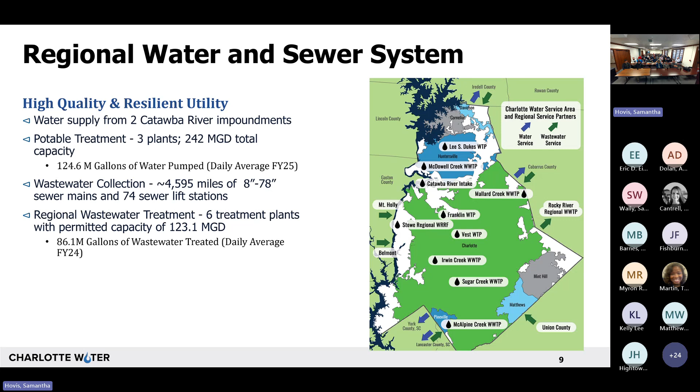And I didn't necessarily say it there, but we're called CLTWater, and we are a department of the city, but we don't just serve the city. We serve all of Mecklenburg County, and then we have a number of interconnections with all of the towns and cities that surround us. Some of them are everyday use and others are emergency connections only.

Lots of valves, almost 100,000. So a lot of work for our field operations teams to make sure those are in working order. And if you've ever done any pipeline work, they always are.

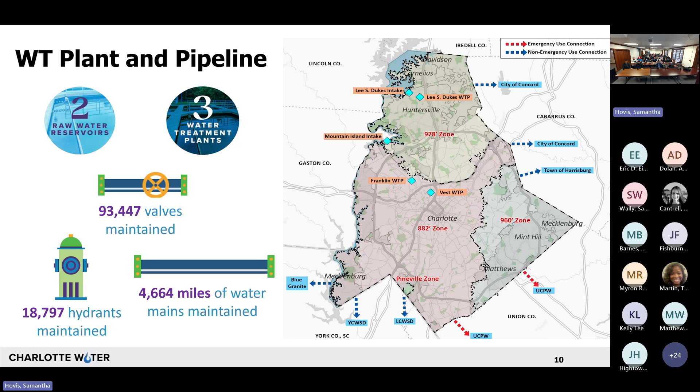We have 2 different raw water reservoirs at the Franklin water treatment plant. And then I mentioned we have the 3 different water treatment plants too.

We have over 9,000 miles of main. On average, we treat almost 90 million gallons of wastewater every day, and we pump out 125 million gallons of water. We are a AAA bond rated company. That's something we are proud of, and it takes a good amount of management to maintain that.

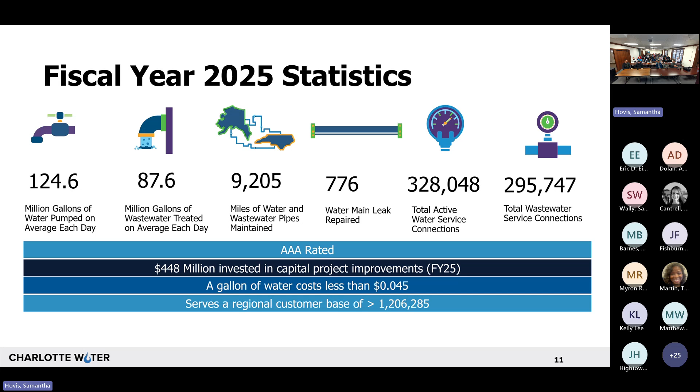As of fiscal year 25, we've invested almost $500 million in capital improvement projects. So there's a lot of money, a lot of opportunities rolling out to be able to maintain these wastewater and water systems and be able to give our customers a good level of service. And then our customer base is over 1.2 million folks and growing. That's a real popular place for people to be.

So I'm going to turn it over to Sam to give us some details on some of the upcoming opportunities. Great, thanks, Nicole. And thanks everybody for coming today. It's really exciting to see this amount of interest in our upcoming projects. So start going through those.

All right, so today we're launching the water treatment plant and pipeline program. And so this is a new holistic program that we've been looking at. You'll see in the map, we have 2 specific areas shown. So we'll highlight those projects in those areas.

But really the reason this has come about and why we wanted to be here today is we're in the process right now of updating our master plan. And one thing that we noticed was that we're seeing significant system demands coming in, and it makes a lot of sense when you're driving through Charlotte. I feel like a tourist sometimes. There's just new buildings all over, and so that just means we have more people needing more water.

We also identified that some of the assumptions that we made originally may have been a little low, and so now is the time for us to try to make up for that. So our per capita usage, originally we thought it was going to continue to go down since our last master plan with the efficient fixtures and other improvements we were seeing, but actually it's plateaued. And so since we didn't see any more advantages from that, that's starting to catch up.

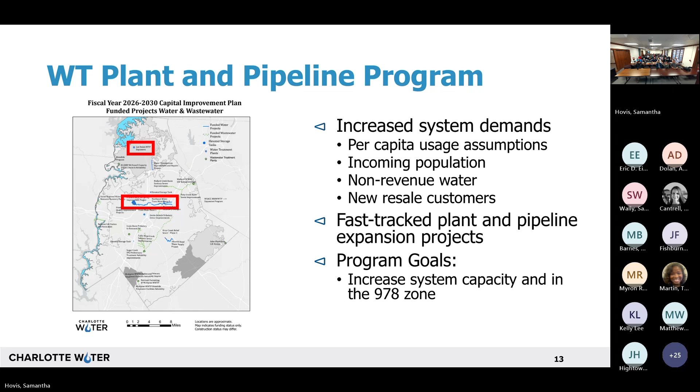So with the opportunity types that we're seeing, we're going to have multiple RFQs going out, and also just ITBs. So next, we'll have progressive design build RFQs, just professional services - I should have said just RFQ right now - but we will have multiple professional service RFQs going out. You might also see RFPs for other services, equipment, and material. So we've got hard bid construction opportunities as well. And then what that does is result in opportunities, therefore, for our subcontractors.

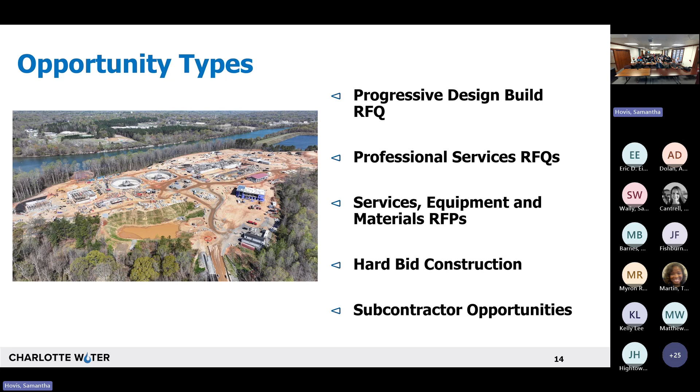So lots of exciting things we wanted to share today. So I'll start off with the water treatment plant opportunities, since we're here at Lee Dukes this morning. So like Chuck had said, this plant is a conventional water treatment plant. It was put online in 1998.

Originally, it was meant to treat 18 MGD. And then in 2000, we did some other modifications right after the initial plant was built. We added a clear well, some other improvements, and we also got approval to high-rate the plant at a filtration rate of 5.5 gallons per minute per square foot. So what that's done is resulted in a treatment capacity here of 25 MGD. So that's where we're at today.

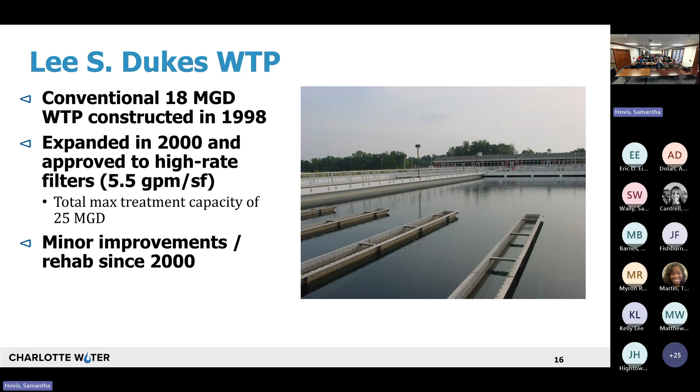So we'll go over the process flow. We'll also talk about this on our tour next, but it's nice to see some highlights. I know it's very small, but we'll walk through it.

We pull our water here from the Blythe Landing intake off of Lake Norman, not too far from here. It flows by gravity in a 60-inch raw water line.

Then we add other chemicals. We have PAC, that we feed. We're actually in the process of getting our chlorine dioxide system up and running, and we have the capabilities of adding chlorine and potassium permanganate. Once it arrives here, we add a coagulant, which is aluminum sulfate, and then it goes through rapid mix.

Then our traditional flocculation and sedimentation, and it moves on to the filters. Here we add our disinfectant, which is chlorine gas, before the filters. Once it goes through the filters, we have our finished water chemicals, which include chlorine, fluoride, and lime.

Then it goes out for storage in the clear wells. We get our CT time, and then we pump it out with our high service pumping station.

So residuals go through the classic process. We have an equalization basin followed by clarifiers and gravity thickeners, and all of that is contained here. We have partners that take those residuals, and then we land apply those.

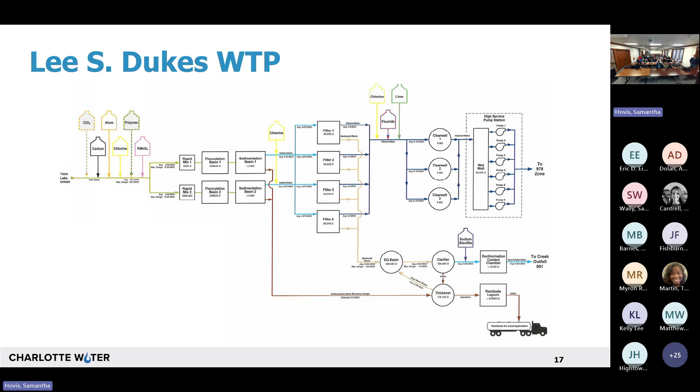Currently, I think it's worth noting, we have 2 projects going on. We have a preliminary engineering report.

We had a person in the chat who wanted to know if we could share this presentation with her. Sure, we can, yeah. Great question, though—thanks for letting me know.

Let's cruise through. First of all, we're going through a preliminary engineering report right now to define what will be included in this Lee Dukes expansion project. We're fast-tracking that with Black and Veatch, and we anticipate that being done in April of 2026.

Then we're also doing a high rate study right now. We want to see if we can get approval to treat more than 5.5 gallons per minute per square foot. We're starting conversations with the state, so we're not sure if that will get approved—there are many more discussions needed to determine feasibility.

One other part of that is we want to make improvements to the sedimentation basins right now, and we plan on adding plate settlers. We're having that design done, and we want to advertise that construction contract in April of 2026. We think the plate settlers will really help with our settled water turbidities and have other advantages as well, so now is the time to make those improvements.

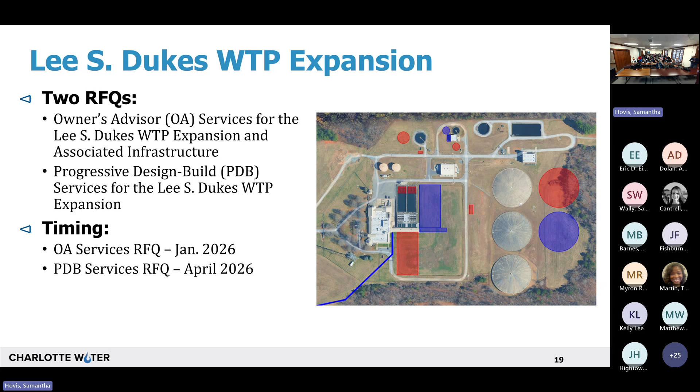We want to try to get that to coincide with having that final document, so we can share it with potential teams and they can see what we're planning. We'll talk shortly about the scope. The OA services will be professional services that help us from procurement of the PDB team all the way through construction and the warranty phases of the Dukes expansion project and any associated infrastructure.

The progressive design build services RFQ scope of work will be for the design and construction of the expansion project, which will have 2 phases. The first phase, shown in red here, will include an 18 MGD conventional treatment train and additional associated structures, processes, and appurtenances—essentially a duplicate of what we have now.

And then we'll also have residuals basins added along with a clear well and some other chemical feed modifications. The other thing of note is the plate settlers that Charlotte Water purchases. We want the PDB team to also install those basically as soon as we kick things off.

Because we want to get that advantage in the sedimentation basins. Once that first phase is done, we want to move directly into the second phase, which will be an additional 18 MGD train. We're still trying to figure out the timing, but phase 2 will include that second conventional train and any other structures and basins required. We've already identified an additional clear well, a gravity thickener, and we're also planning on modifying the residuals process. We plan to have mechanical dewatering and a structure and all of that equipment added.

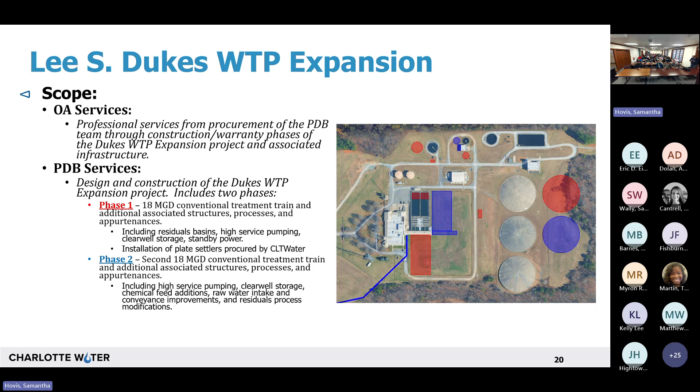The other thing I will note is we'll have to have a 60-inch raw water main installed from the existing intake all the way here. The nice thing is we already own land, so we'll just need to install that dual raw water main.

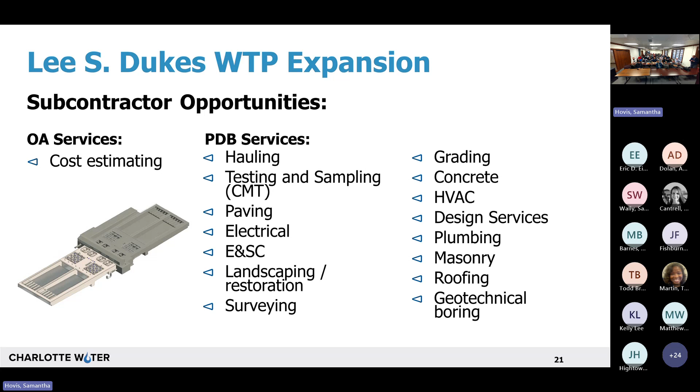We'll have plenty of subcontractor opportunities along with these projects. So from an OA services standpoint, we're just putting out some ideas. There could be cost estimating support with the PDB team, hauling, testing, sedimentation control, erosion and sedimentation control, surveying—you name it, we anticipate our teams will need that support. That list isn't everything and it's not limited to that; those are just our initial ideas.

All right, so we'll move into the water pipeline opportunities now. Like Chuck mentioned, we'll also have this northeast-west transmission main, and we'll be breaking it into phases, starting with phase 1. The scope is roughly 33,000 linear feet of large diameter transmission main, going from Franklin to the new Statesville Road booster pump station. The pipeline diameters will vary anywhere between 48 inches and up to 84.

We're finalizing the actual diameters right now through some modeling. It should be noted we're doing the design in-house, so Jason Marshall is leading that work. We've also identified that we'll have an RFQ for engineering services and support, anticipating that scope to include cost estimating, constructability reviews, and then construction admin support. We're finalizing the details, but you'll see that issued in the 4th quarter of FY26.

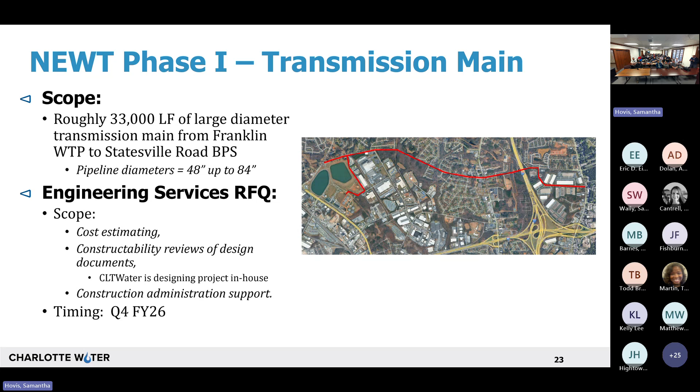That should be in spring, summer of next year—coming up. All right, and then we'll move into the actual construction part. We'll have a hard bid with this project. We may break it up into two separate projects; we're still determining that. But the timing is we'll have that design completed, and we'll have that project out on the street in the 1st quarter of FY28. So that will be the summer of 2027.

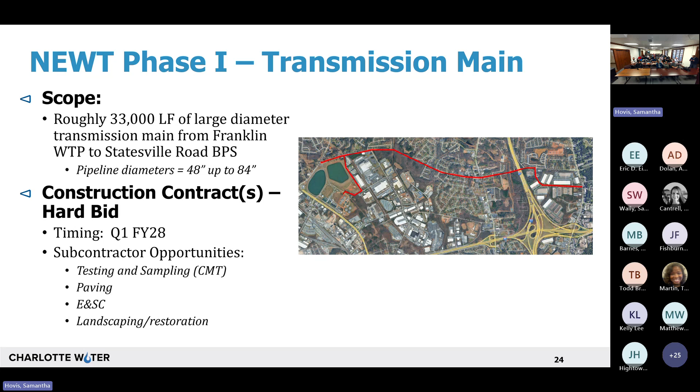So our fiscal years start in July, end in June. So July of 2027, we'll be hitting the streets. And then once again, we have subcontractor opportunities identified.

And then finally, this is our last project that we're going to highlight today: NEWT phase 1 also has a Statesville Road booster pump station project that we're piecing out separately. Right now we have this engineering services RFQ on early bird, out there for people to put a proposal together. That deadline is January 15th, so everyone note that.

The scope is going to include design of a 25 MGD booster pump station, along with decommissioning our existing Starita booster pump station. That has its own subcontractor opportunities as well associated with that design.

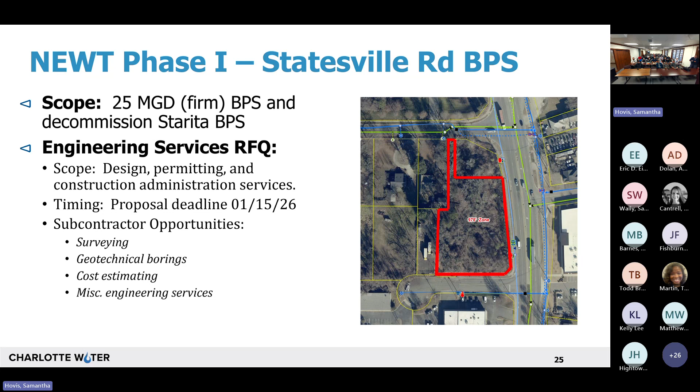From a construction standpoint, we'll also do a hard bid on this—classic design bid build. The timing is we want this advertised in the 2nd quarter of FY28, so we're thinking September of 2027. Once again, more subcontractor opportunities are suggested areas that could be of benefit, like grading, clearing, paving, those sorts of areas.

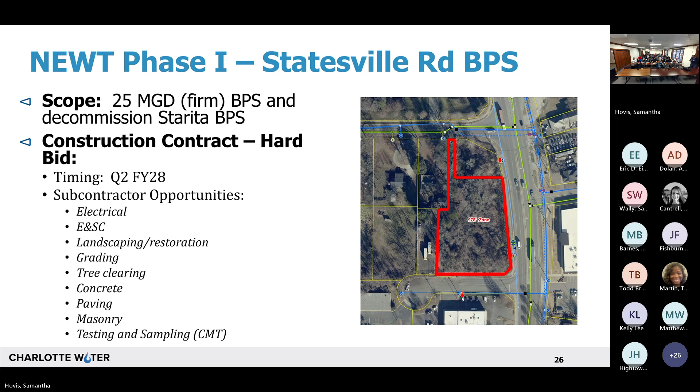And so that concludes overall what we're presenting on this program. We're really excited to share this with you, and we really appreciate this opportunity. So are there any more questions on this before we start the tour?